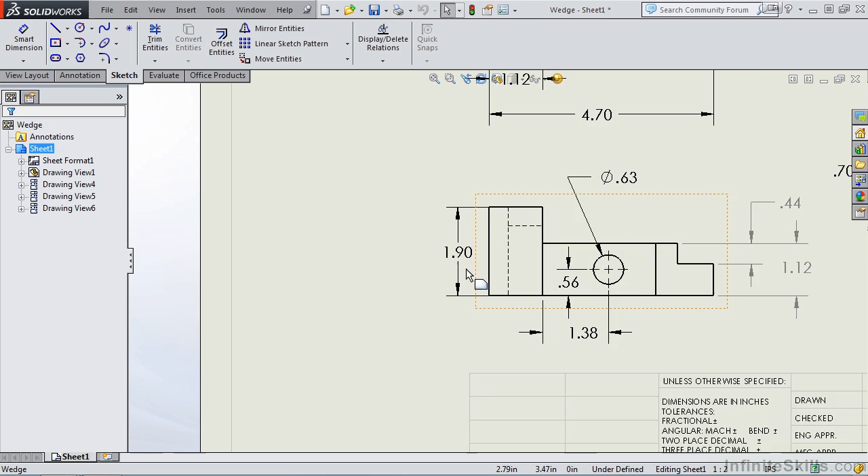Now what we're going to look at is how do we format these dimensions. The formatting applies to both driving and driven dimensions. So let's get started. Let's zoom up on this 1.90 dimension, and we'll select the dimension. The property manager opens for this dimension, and notice, like we talked about before, we have the availability of a tolerance. So let's try this out.

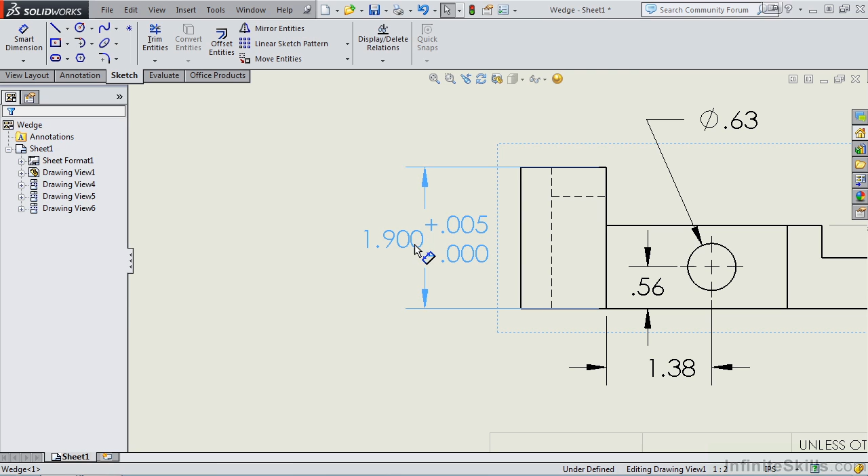Instead of having none for tolerance, let's select bilateral. Bilateral is plus minus. I am going to enter a value of plus 5 thousandths minus 0. In order for this to display and not round off, I need to change the precision to 3 places. I'll go ahead and close out of the property manager and then move this dimension out a little bit so it displays correctly and it's not on top of the view.

I select another dimension and we scroll down the property manager. I want to show you that we can add other symbols. In fact, we have all of our common drafting symbols here: diameter, and notice the output on the screen, degrees, plus minus, center line, and more. Now notice we do have a more button. There's a lot of information here.

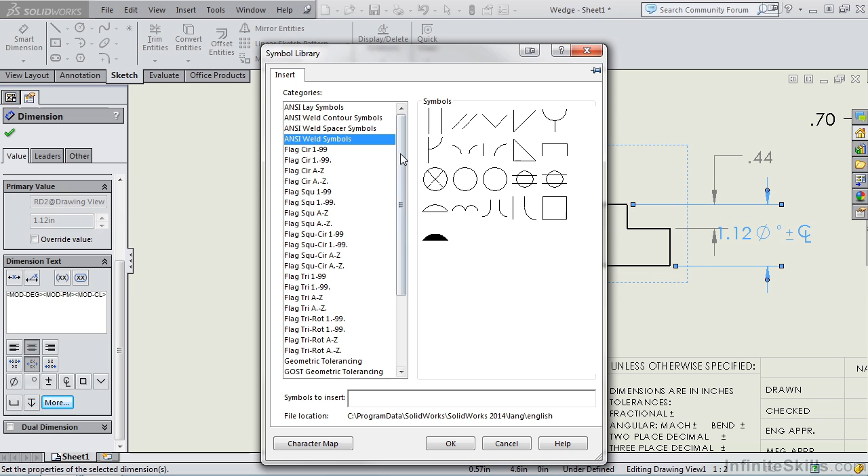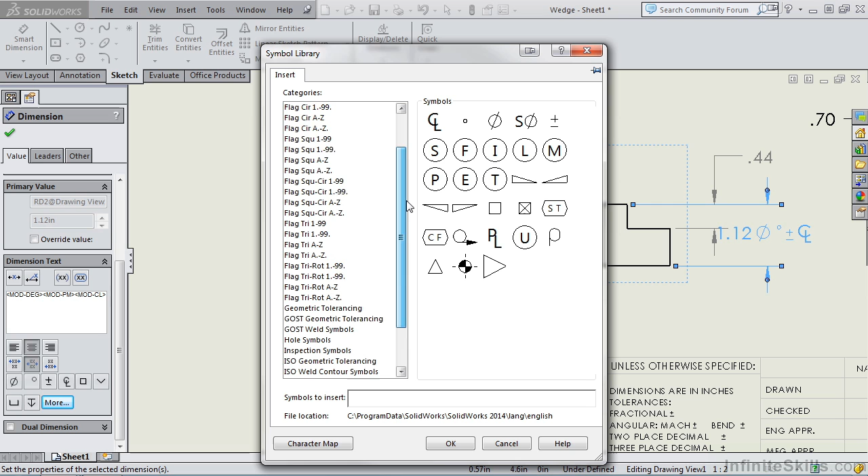You have your lay symbols, weld symbols. Scroll down, we have different flags. We have circular flags, square flags, all with numbers and alphabet. We have flags, which are triangular in shape. And then we have a lot of the GD&T symbols. We have hole symbols. So you can see, pretty much any symbol you're looking for, you're most likely going to find it in this dialog box.

Right below this, and at the very bottom of the property manager, we have dual dimensioning. Now let me go ahead and delete what I placed in this earlier. So it returns it to 1.12. Let's make this a dual dimension. I am going to check this.

And one last thing before we conclude this lesson, you may have noticed this little graphic pop up as we were moving dimensions in the earlier lessons. But if I select a dimension, notice we have this little graphic pop up here. This is for the dimension palette. Very handy feature. When you move your cursor above it, notice this window appears. This allows you to change the tolerance type.

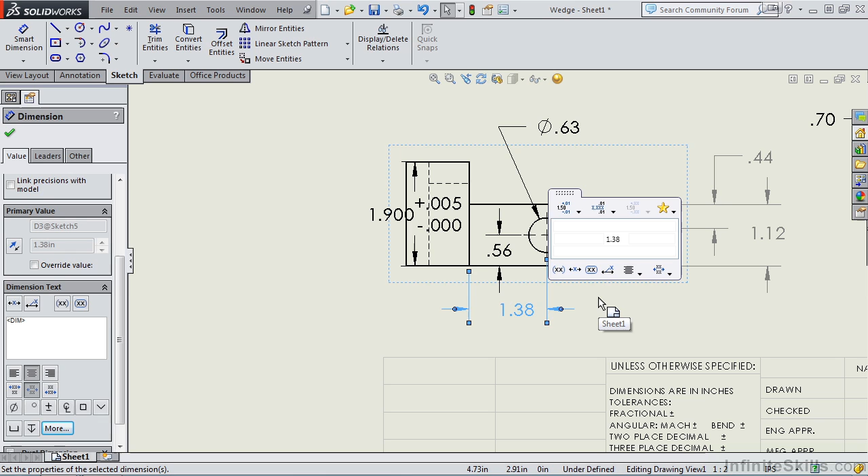It allows you to change the precision, add prefixes, suffixes, make the dimension a reference dimension, an inspection dimension, and so on. So this is a fairly handy window that once you use it a few times, you will find yourself using it on a regular basis. So one thing that you should know about formatting of dimensions: if there is a certain type of format you need, it is available. It's just a matter of getting into the property manager, moving through the different windows, and finding that option.